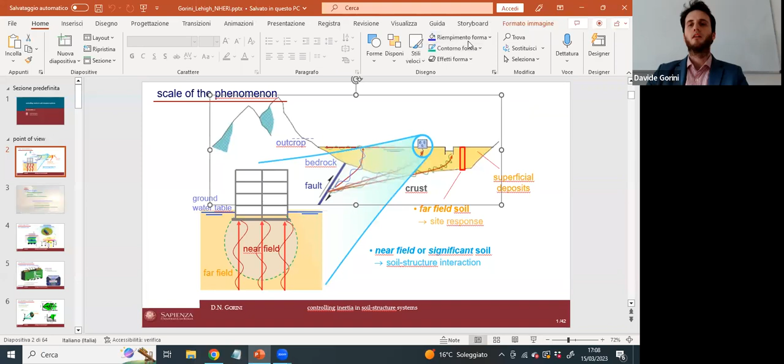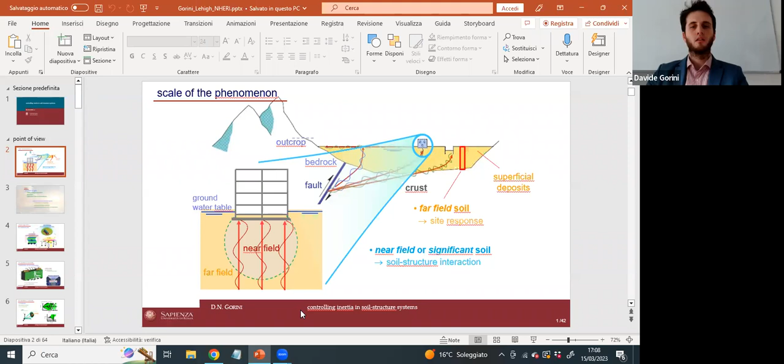Let's first look at... let's first focus on the scale of the phenomenon we are dealing with, because we know very well that seismic waves travel a long way before reaching us. In addition to the site effects related to the propagation of seismic waves in the far field, in the soil region not affected by the presence of the superstructure, the foundation input motion for the structure is further modified by the direct interaction of the structure with the so-called significant soil region, or near field soil region.

That is not to be confused with near field earthquakes, which instead have a short source-to-site distance. Soil-structure interaction effects localize in this region and are due to the exchange of inertial forces between structure and near field soil region, and to their different mechanical properties. I will call this system the foundation-near field system, or geotechnical system from here onwards, or simply geosystem, which will be manipulated and analyzed today in order to mitigate earthquake-induced effects on some common structural typologies, such as girder bridges, buildings, frequency-based anti-seismic devices, and so on.

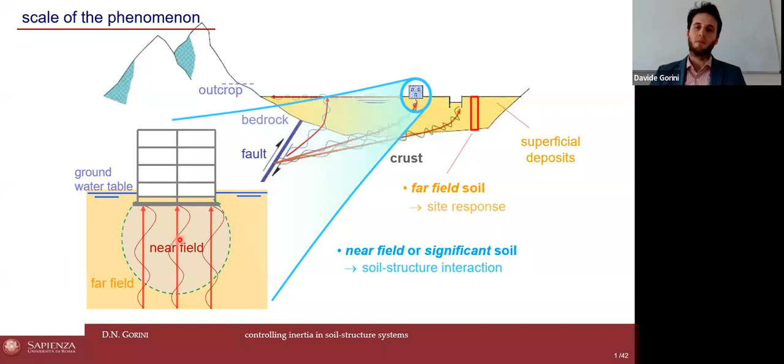So the sunrise in the background is due to the fact that the seminar aims at providing some openings towards new solutions in which the soil is regarded as a cardinal component to control structural vibration. To this end, I first need to introduce some numerical methods able to account for the distinct features of soil-structure interaction in the nonlinear dynamic analysis of structures, for then controlling them in the second part of the seminar.

And therefore, to this end, in the second part of the seminar I will introduce the concept of seismic resistant soil-structure systems, providing some passive seismic protection solutions strongly interacting with soil. That will be faced exactly by using the discussed numerical methods.

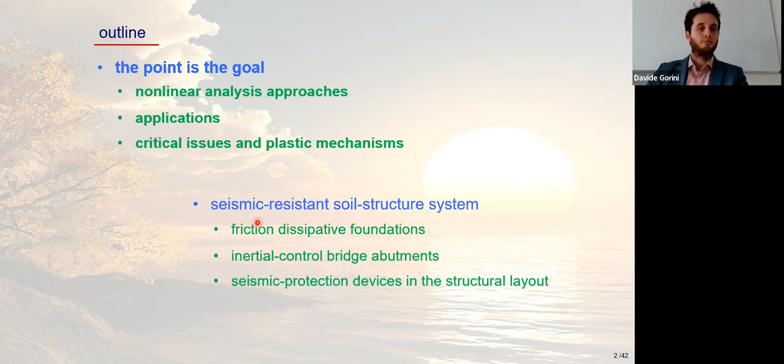So let's go through the first part. I see three levels of knowledge of the problem: understanding, design, and assessment.

Understanding complex phenomena typically entails a refined, detailed analysis of specific problems, while design has completely different requirements, because it is definitely, and fortunately, based on analytical or robust simplified numerical procedures in order to get very reliable and manageable results.

Assessment can be associated with an advanced verification stage of structures, and from the standpoint of numerical modeling, it's more or less in the middle between the former goals. So the analysis approaches related to these goals will be used in a complementary manner in this seminar.

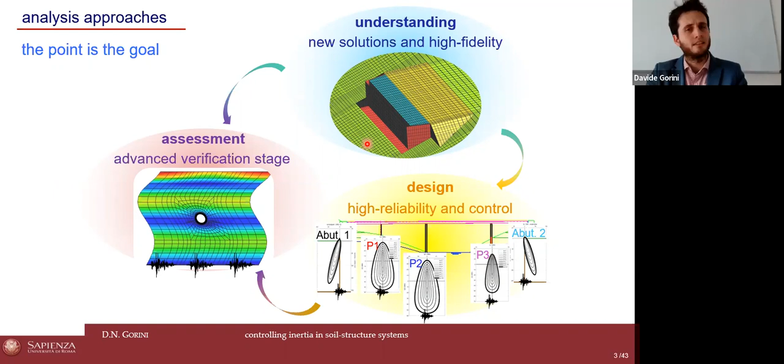I will start to employ an advanced numerical modeling technique to point out the importance of soil inertia on the structural performance, as important additional effects to the ones developing in the superstructure that are instead, in my view, most well known in the literature, at least with respect to the soil effects.

This is a reference example of the so-called direct approach, that entails the use of nonlinear dynamic analysis on the whole soil-structure system, simulating in a unified fashion the propagation of seismic waves. Hence, soil-structure interaction effects are implicitly taken into account in the computation.

This full soil-bridge model was implemented in OpenSees during my PhD and is inspired by the case study of the Pantano Viaduct, that would be the approaching structure to the Messina Strait suspension bridge in Italy.

So the structural model is very simple. It's composed of a continuous deck presenting an alternating strong and weak contact with vertical elements. With strong contact, I mean that the deck is connected also longitudinally to the vertical support and not only in the transverse direction. The subsoil is composed of a dry deposit of the well-known Messina gravels.

And the sole longitudinal component of a near-collapse earthquake is applied to the base nodes of the soil domain. So the nonlinear dynamic analysis on such a system was...

carried out using the OpenSees interpreter for parallel computing and using the supercomputing resources at the DesignSafe facility in order to get reasonable computation times.

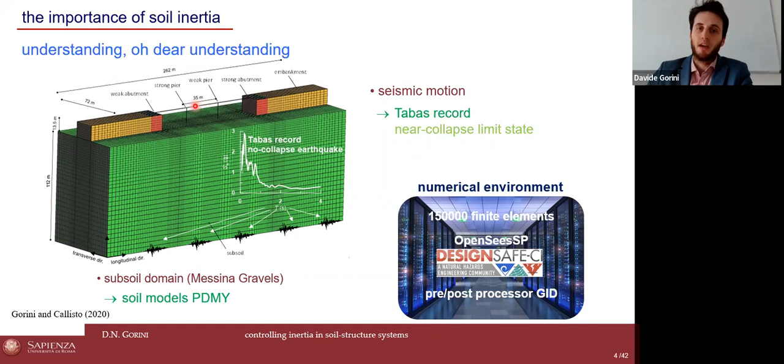Since the focus is for the moment on the soil inertia only, the structural behavior is regarded as a simple viscoelastic behavior, while the soil behavior is modeled through the PDMY model, that is formulated within the context of multi-surface plasticity with kinematic hardening and non-associative flow.

So the hardening response starts from the innermost yield surface until the attainment of the outermost ultimate surface, corresponding to critical state conditions for the soil. The model was calibrated on several experimental data on undisturbed samples of Messina gravels.

As an example over here, you can see the response to an undrained cyclic triaxial test. This is the relationship between the deviatoric stress as a function of the mean effective stress, and this is the evolution of the pore water pressure buildup with the axial strain.

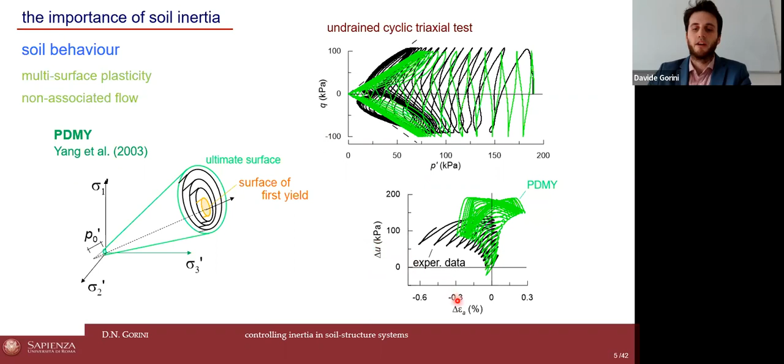So let's come to the performance of the bridge, expressed in terms of time evolution of the longitudinal displacements of the abutments and the strong pier, and the relative acceleration response spectra, and the post-earthquake deformed shape of the bridge.

Well, the dynamic response of this case study of the bridge is going to be controlled by the response of the strong abutment. In fact, the dynamic amplification of the structure localizes in this spectral region, in which the spectra of the strong abutment and the strong pier show the maximum ordinates.

And this can be ascribed to the resonance of the soil-abutment system according to a first mode shape. In fact, the spectra of the strong and weak abutments are basically overlapped over here, and therefore this amplification cannot be related to the dynamic effects transferred by the superstructure.

This amplification engages in turn the nonlinear soil behavior, causing significant irreversible displacements and reflecting in permanent internal forces in the structural members. So soil inertia is driving the bridge response.

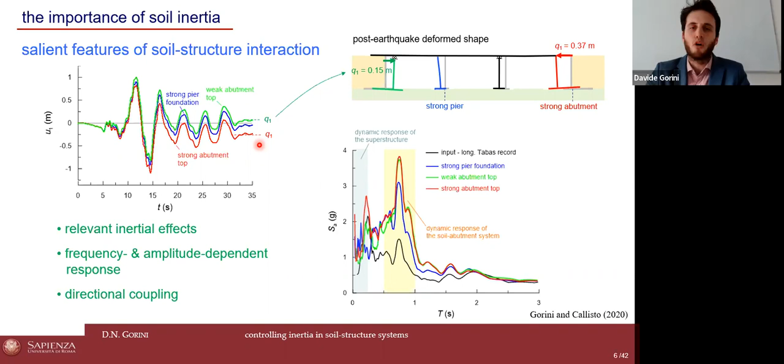And these peculiar features can be quite well captured by a direct approach, which however presents some complexities, because in addition to the computational effort, it also requires a non-trivial implementation of the model and interpretation of results that make this approach less practical for design purposes, for which instead my standpoint to include soil structure interaction in the nonlinear dynamic analysis of structure is the macro element approach.

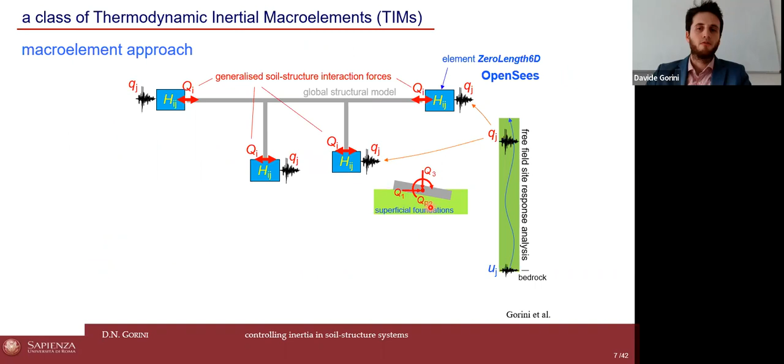To date, it's been mainly developed for shallow foundations and oftentimes neglecting soil inertia, while here a wider class of macroelements is proposed, conceived to simulate the nonlinear and inertial multi-axial response of geotechnical systems in the structural analysis at minimal computational effort, because the macroelements are implemented in OpenSees as multi-axial materials that can be assigned to a new zero-length finite element connecting two overlap nodes that can be connected to the generic base node of the global structure model.

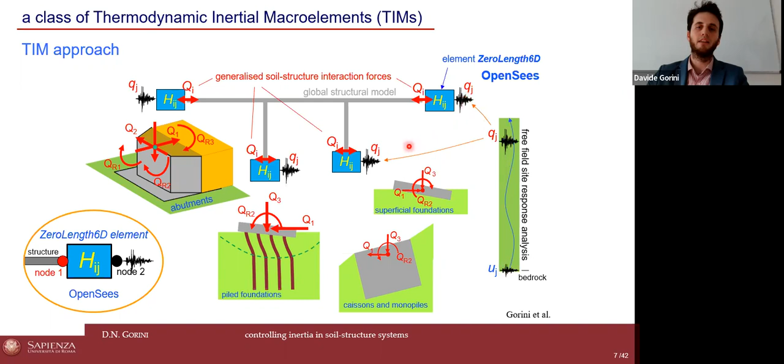The generic macroelement, called TIM, thermodynamic inertial macroelement, reproduces the behavior of the foundation structure and of the near field soil region, and under dynamic loading is perturbed by a free field ground motion to carry out a nonlinear dynamic analysis in the time domain on the global structural model.

A TIM is a relationship between the generalized forces acting at the soil structure contact node, Q sub I, and the corresponding displacements and rotations, small q sub j.

Without going through the mathematical details, the TIMs are formulated as multi-axial, multi-surface plasticity models with kinematic hardening, derived within a rigorous thermodynamic approach typically called hyperplasticity, so that the incremental response can be obtained by simply differentiating two consistent potentials: the energy and dissipation function.

The yield surfaces of a TIM constitute the so-called plastic domain, within which the model exhibits an elastic plastic response, while the inertial effects developing under dynamic loading are reproduced through appropriate participating masses. So TIMs can exhibit a combined nonlinear and frequency-dependent response.

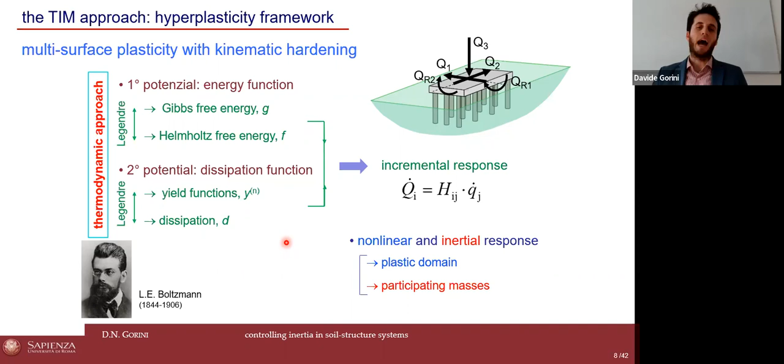Three are the basic ingredients for their calibration: ultimate capacity surface, initial stiffness matrix, and participating masses of the soil foundation system. As per the ultimate capacity surface, this corresponds to the load combinations activating the global plastic mechanism of the geotechnical system. And in the TIM approach, it represents the outermost yield surface of the plastic domain.

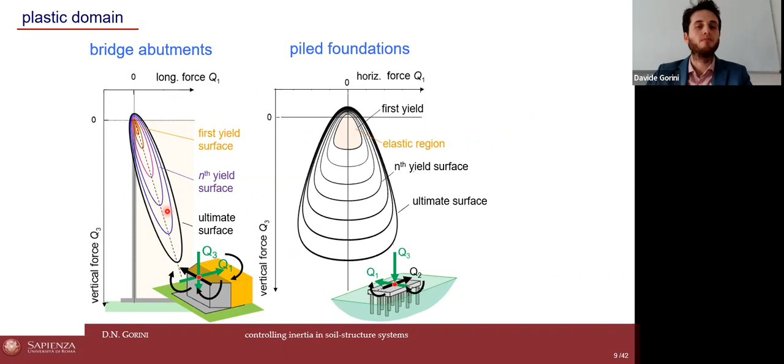Yield surfaces are assumed to be homothetic to each other, limiting the representation to the longitudinal and vertical space of the loads transferred by the superstructure. These are the initial configurations of the yield surfaces for the TIM for bridge abutments and pile foundations.

Surfaces evolve in the force space according to a consistent kinematic hardening law, presenting an increase in size from the innermost first yield surface enclosing the elastic response up to the ultimate locus, the ultimate capacity surface, which can be calibrated straightforwardly based on standardized procedures.

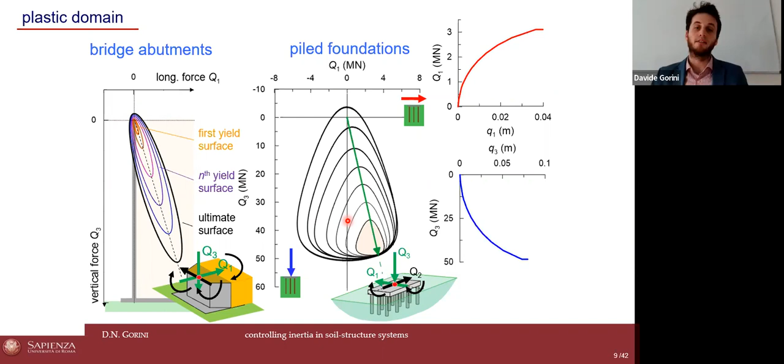For bridge abutments, the ultimate surface is represented by a rototranslated hyperellipsoid in the 6-dimensional force moment space of the forces exchanged between abutment and deck. While for pile foundations it is a hyperegg with superelliptical generatrices, reflecting the importance of load direction on the strength and stiffness properties of the geotechnical systems.

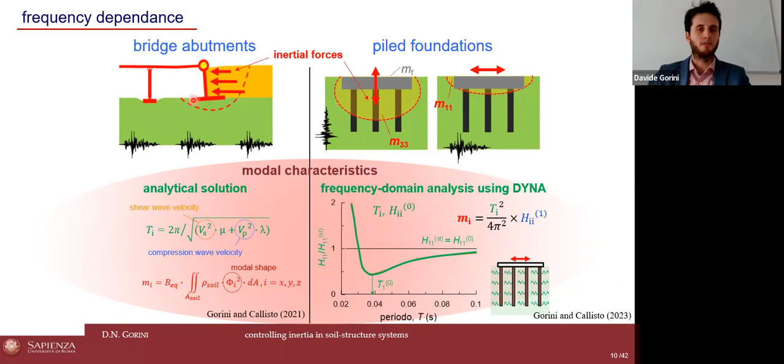Now, frequency dependence relates to the mass involved in the dynamic response. Using the TIM approach, this can be simulated by assigning to the generic soil structure contact node masses, M sub I, evaluated together with the initial stiffness matrix of the macroelement in order to reproduce the dynamic amplification corresponding to the resonant features of the geotechnical system.

For bridge abutments, the modal periods and masses along the several degrees of freedom of the geotechnical system can be computed through analytical solutions. Then the initial stiffness matrix of the TIM can be obtained simply by the equation of the vibration period of a single degree of freedom system for each degree of freedom of the soil structure contact.

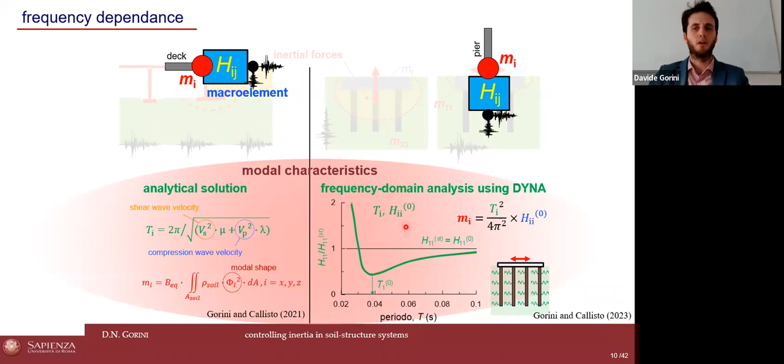For pile foundations, the participating masses can be taken as a function of the small strain vibration period and initial stiffness matrix, quantities that can be straightforwardly obtained, for example, using the software developed by Professor Novak.

Inertia models the cyclic response. Let's carry out a series of dynamic analyses on this coupled soil-abutment model and on the respective MEM, applying to the front wall in the former case and to the free node in the latter case a longitudinal load varying over time with a sinusoidal law, varying the period.

This is the resulting dynamic amplification curve at small deformation levels, quite well captured by the MEM, in which the maximum displacement of the abutment top, normalized with respect to that produced by a static force, is plotted as a function of the period.

The response is dominated by the first mode that occurs at a relatively large period, 0.6 seconds, because of the important inertial effects coming from the embankment mainly. This corresponds to a much more open force-deformation cycle with respect to that produced by a static application of the load, shown in cyan.

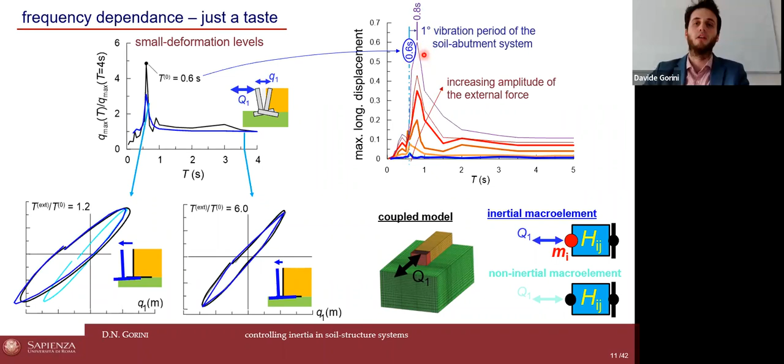Moreover, in the nonlinear regime, the masses of the MEM interact with activated plastic flows and therefore with a reduced tangent stiffness of the model, elongating the natural period, as is evident looking at the dynamic amplification curves for increasing load amplitude levels. This is the small strain vibration period, while 0.8 seconds is the fundamental vibration period in the longitudinal direction for this system at large strain levels.

A comprehensive validation of the MEMs is reported in the relative papers, while now I'm going to use this approach for predicting the dynamic response of some peculiar structural topologies.

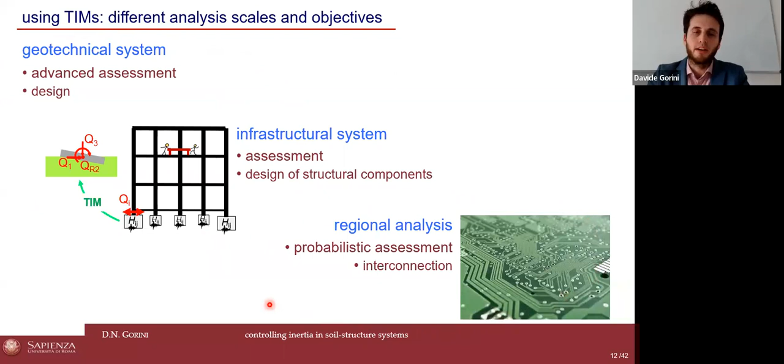By virtue of their computational efficiency, MEMs can be used for several purposes, from the analysis of the single soil-structure system to extensive studies aimed, for instance, at pointing out critical issues in the current design methodologies.

That is exactly the case of a large research project recently funded by Italian Civil Protection, concerning the seismic reliability of Italian code-conforming bridges, in which I was involved and had the opportunity to work with several people with different backgrounds.

The MEM approach was used to model structural interaction in the nonlinear dynamic analysis on a variety of soil-bridge layouts, and the models were all implemented in OpenSees. Four structural typologies were considered with reference to three sites with high, medium, and low seismicity. A multiple stripe analysis was carried out, considering 10 seismic intensities and 20 natural records for each.

The goal of the next couple of slides is to point out critical mechanisms affecting typical structural layouts in order to control them in the second part of the seminar. For brevity, I'm going to focus only on the case of the tall viaduct in L'Aquila, in the high seismicity L'Aquila region, subjected to the selected 200 seismic records.

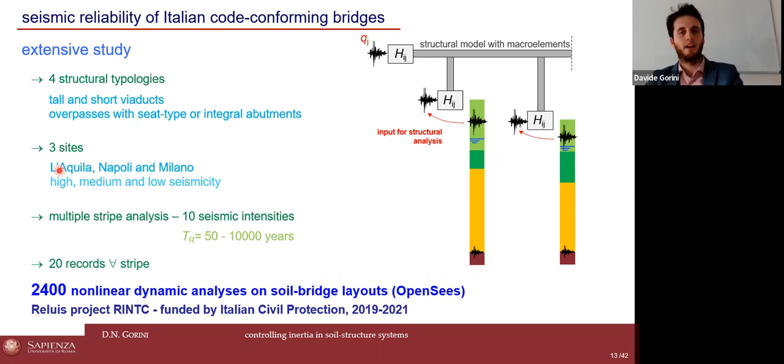The bridge rests on 5 supports, having deep foundations, and the soil presents a shear wave velocity varying from 200 meters per second at the foundation of abutment A1, up to 1,000 meters per second in correspondence of the bedrock, located at 95 meters of depth.

As per the static scheme, the deck is connected longitudinally to piers P2 and P3, while to abutment A2 through a couple of viscous dampers, and it's free at P1 and A1. In the transverse direction, the deck is connected to all supports.

The MEMs for the abutments and the piers' foundations were calibrated using the respective procedures just discussed. The piers are modeled as fiber section beam-column elements reproducing the effective properties of the reinforced concrete cross sections. The bearings are modeled as a proper assembly of rheological elements, and finally the deck is regarded as equivalent linear beam elements.

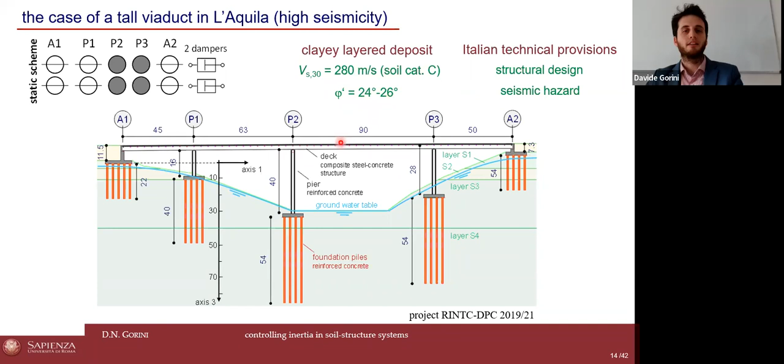I missed to say that the soil friction angle ranges between 24 and 26 degrees. A staged analysis procedure was adopted, in which after the gravity analysis, the 3-component seismic motion is applied to the base nodes of the macro elements.

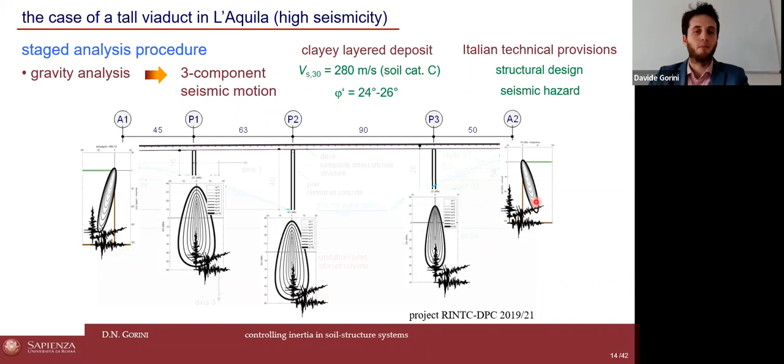Let's refer to the most severe performance level, which for the bearings consists in the uplift of the bearing in the vertical direction and in the attainment of the maximum stroke and of the shear resistance of the bearing in the horizontal direction, depending on the type of bearing we are talking about.

For geotechnical systems, the severe damage consists in the failure of the foundation piles. These are the computation times of the set of analyses carried out using the bridge model with TIMs. The computation times are very low and don't require any partition of the model, nor the use of particular computing resources.

Looking at the results, a critical mechanism occurs starting from stripe 5, as an intensity level equal to 5, which is lower than stripe 7, referring instead to basically the design seismic intensity for the ultimate limit state.

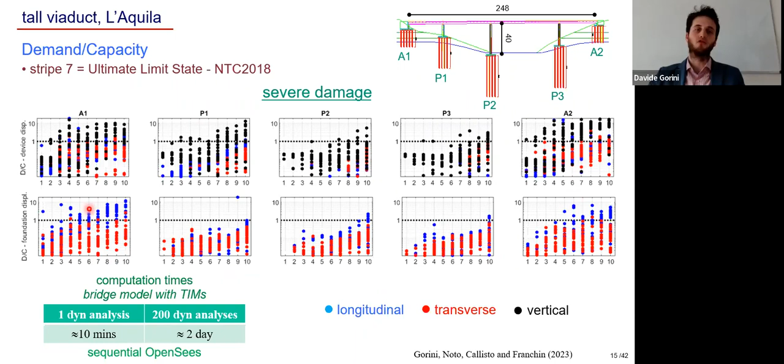This is mainly because of the inertial forces coming from the abutments, from the embankment of the abutment. So critical mechanisms are represented mainly by the attainment of the capacity in the horizontal and vertical direction for the bearings of the abutments and pier P1, and by the failure of the foundation piles, mainly in correspondence of the abutments, exactly for the soil inertia pushing the abutment inwards.

This result, in my view, shows something relevant, because the dynamic performance of a structural system affected by soil tends to be controlled by a delicate arm wrestling between inertia and dissipation. Inertia amplifies the dynamic response in correspondence of the resonant frequencies of the whole system. This facilitates strength mobilization, also in systems typically regarded as linear in design and assessment, such as the case of abutments.

But these critical features can also be regarded as a resource for a system, because it's well known that strength mobilization, the attainment of the strength, limits the forces that can be transferred to the superstructure. And this leads to the cardinal question pursued in this seminar: how can structural inertia be controlled?

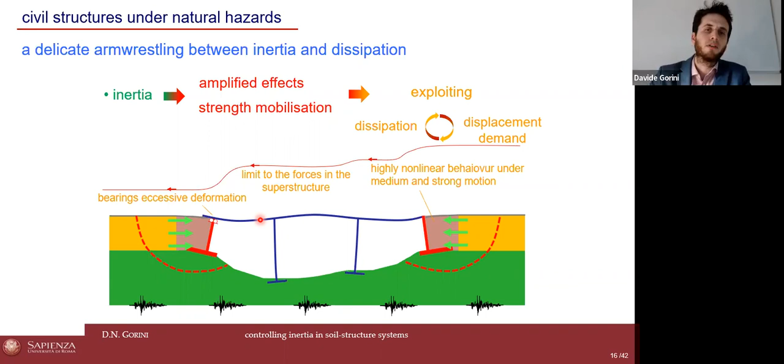To this end, let me first introduce the concept of a seismic resistant structural system. I mean a system able to balance its intrinsic and added features towards the satisfaction of design requirements. To reach this balance, I'm going to limit inertia in the overall system by weakening the geotechnical system, or tune properly the dynamic response of the geotechnical system to that of the superstructure.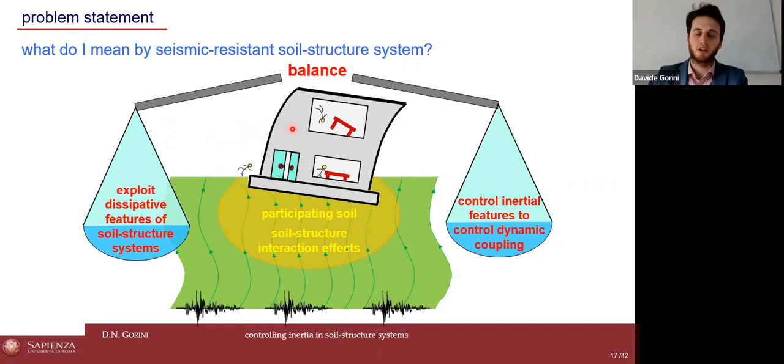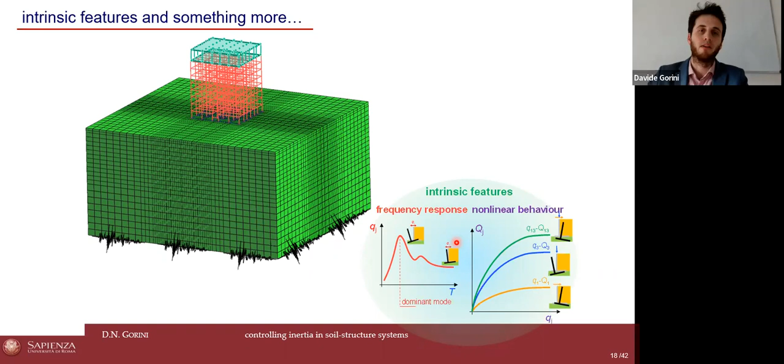Of course, by considering the intrinsic features of the foundation soils that we have just seen can play a role, but in some cases this may not be enough. So we may need something more. The structural layout can be equipped with additional dissipative sources placed at the foundation levels or within the structural layout. In many cases, these technologies interact profoundly with soil.

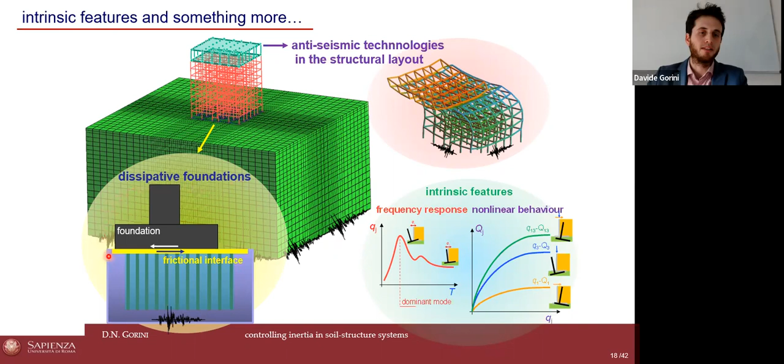Let me start closer to soil, talking about a mitigation technique whose performance is strongly related to the mechanical properties of the foundation. I'm talking about friction dissipative foundations.

Some years ago, Professor Luigi Callisto and I were impressed by the adoption of this solution in the case of the Rion-Antirion cable-stayed bridge in Greece, and then the Izmit Bay suspension bridge in Turkey, where the foundations of the tower were provided with an easily implemented solution consisting of a group of piles not connected with the overlying caisson, because of the interposition of a gravel layer between them, allowing for a controlled displacement of the caisson with respect to the foundation piles under strong shaking, dissipating energy by friction and therefore limiting the maximum shear forces transferred to the tower.

Our focus was at first on the foundations of the Izmit Bay Bridge only, employing a very advanced numerical modeling that I don't want to dwell on, because from that understanding a simplified interpretative model was devised for direct application in design. In the method, the foundation input motion comes from a ground response analysis and is applied to the base of a modified Newmark model composed of a rigid block representing the foundation combined with a single degree of freedom system, providing a very basic description of the dynamic response of the superstructure.

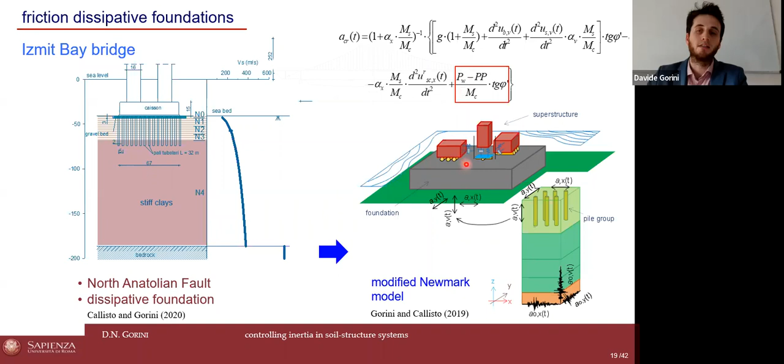This is the friction angle of the interface, but it also depends on the foundation mass, on the vertical motion, on the inertial effects developing in the superstructure, and on additional water pressures acting on the footing, for instance in the case of submerged foundations. So, in order to get a more general view of the factors controlling this quite complex performance of the friction foundation, an extensive study was carried out using simple Ricker wavelets as input motion, characterized by an amplitude and a period.

I'm going to discuss a couple of results of the study, in which, for simplicity, the seismic motion is composed of the longitudinal component of the base motion. Here you can see the relationship between the maximum relative displacements between the foundation and the underlying soil, expressed in a non-dimensional form, as a function of the interaction parameter XIR, intended as the ratio between the fundamental vibration period of the superstructure and the mean period of the input motion.

Note that other descriptors of the effectiveness of the friction interface can be equivalently used, for instance the reduction of the maximum spectral accelerations in the foundation with respect to the input one.

So this quantity takes, more in general, the name of generalized output quantity. These trends refer to a decreasing value of the mass participation factor of the superstructure.

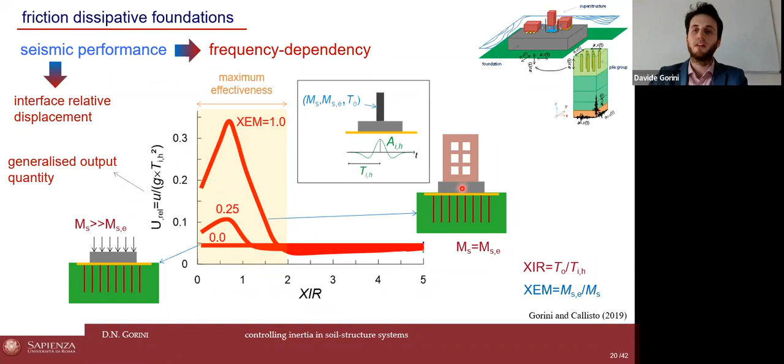It can be noticed that the performance of the foundation is strongly affected by the interaction parameter. That's because of the inertial effects developing in the superstructure, which in this region of maximum effectiveness of the friction foundation agree with the inertial forces developing in the foundation.

This result, together with the other abacuses obtained in this study, can be used for a preliminary design of the foundation. The objective is to limit the maximum shear forces transferred to the superstructure.

So, given a structure in a specific site, a design requirement can specify that the maximum spectral acceleration, SA max, be lower than a limit value, a threshold, SA lim. Accordingly, the target generalized output quantity, Y sub I lim, can be computed as SA max minus SA lim, normalized with respect to SA max.

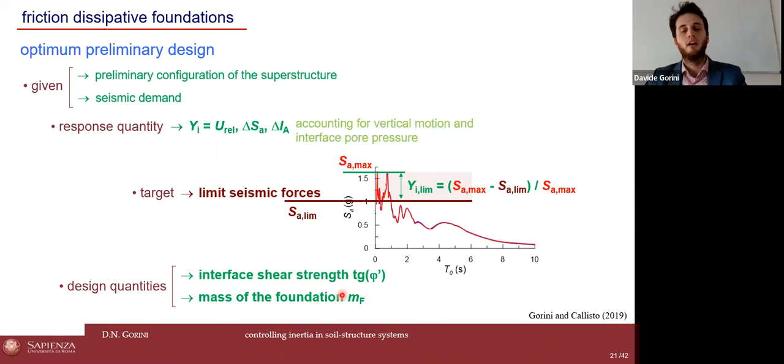So the design consists in determining the optimum values for the interface shear strength and mass of the foundation, producing the desired generalized output quantity.

This abacus relates the interaction parameter corresponding to the maximum effectiveness of the foundation to the relative excited mass. This is basically an indicator of the relative contribution of the inertial forces developing in the superstructure and those in the foundation to the overall dynamic response.

The results are quite well approximated by a bilinear trend. This means that, given XIR for the case at hand, the foundation mass can be computed.

And finally, through this abacus, one can obtain the shear resistance along the dissipative interface by considering the target generalized response quantity, assuming a structural damping, and using the optimum value of the relative excited mass found before.

So this simple design procedure points out that the optimum performance is strongly related to the inertial features of the entire soil-foundation-superstructure system.

But why not extend this simple, easily implemented solution to the case of bridge abutments, specifically the problematic bridge abutments, to control soil inertia transfer to the deck?

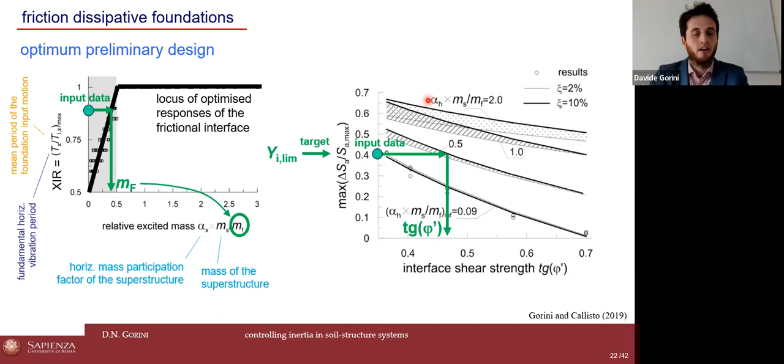Well, in this direction, let's take a first simple step. Let's consider, as a first case study, an abutment with shallow foundation.

But this capacity is not strictly needed under seismic loading as it is under static conditions, so it may be reduced in order to enhance energy dissipation under dynamic conditions.

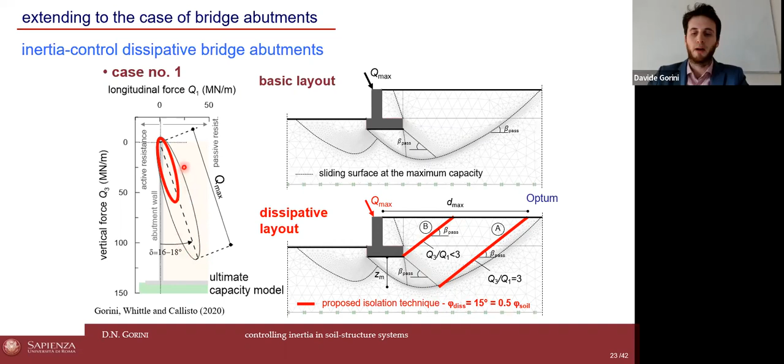In fact, the outer yield surface, the dissipative surface, is involved in a mechanism for load ratios equal to or greater than 3, while the interface closer to the wall is involved for longitudinal loads that are proportionally larger.

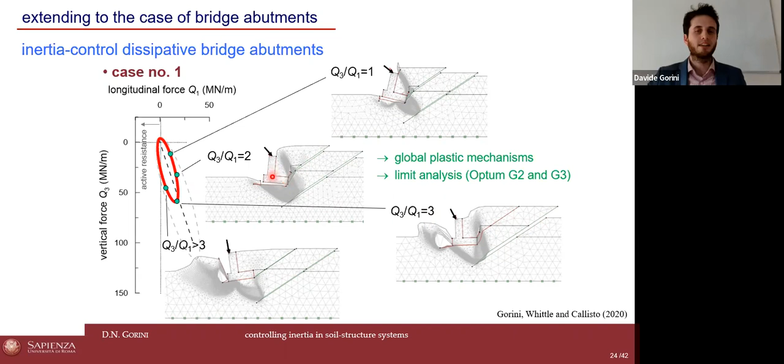This abutment is exactly the one of the full soil bridge model shown at the beginning. So let's try to test this solution on this case study, using the TIM approach to model soil-structure interaction in the structural analysis, and referring to the same seismic input shown at the beginning.

In this case, the model for the abutments was calibrated considering the same initial stiffness of the basic layout, and the plastic domain calibrated on the new capacity surface locus. Finally, the participating mass of the soil-abutment system is computed as this volume, while this inclined boundary follows the outer dissipative interface.

Now, the performance of the bridge is quantified in terms of the time evolution of the relative displacements between the strong abutment and the strong pier, which are the only elements connected longitudinally to the deck, and as time evolutions of the flexural forces at the base of the strong pier: this is the shear, this is the bending moment.

Consider the performance of the bridge in the basic layout, without dissipative interfaces, shown in blue. Marked irreversible relative displacements develop in the deck during the interval of maximum intensity of the seismic motion, reflecting in important permanent internal forces at the base of the strong pier.

This is because the strong abutment is driving the bridge response, with accumulation of important irreversible displacements inwards. But if structural inertia is controlled, the performance improves remarkably. In fact, both the permanent and the maximum internal forces in the entire bridge layout reduce a lot.

This is due to the combined effect of the attainment of the strength along the dissipative interfaces and of the lower, much lower soil volume involved in the dynamic response of the bridge. And if in principle we were able to fully inhibit soil inertia at the abutment locations, this would be the result shown in violet, leading to the minimization of the earthquake-induced effects in the entire layout.

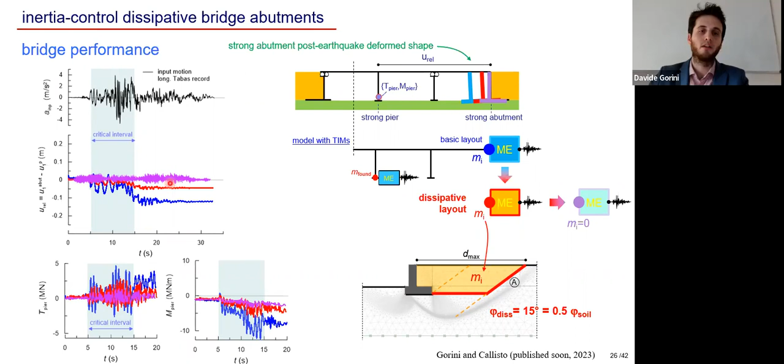Now let's apply this promising solution to the next case study, which refers to abutments with deep foundations. So the bridge performance is again analyzed using the TIM approach. The point is to calibrate the TIMs for abutments and pier foundations, considering the presence of dissipative layers within the soil.

Starting with abutments, this is the conventional layout of the generic abutment A1, but identical considerations can apply to abutment A2. This is the capacity locus of the conventional layout in the space of the longitudinal and vertical loads applied on top of the front wall. In this case, I'm using a slightly different layout of the dissipative layers.

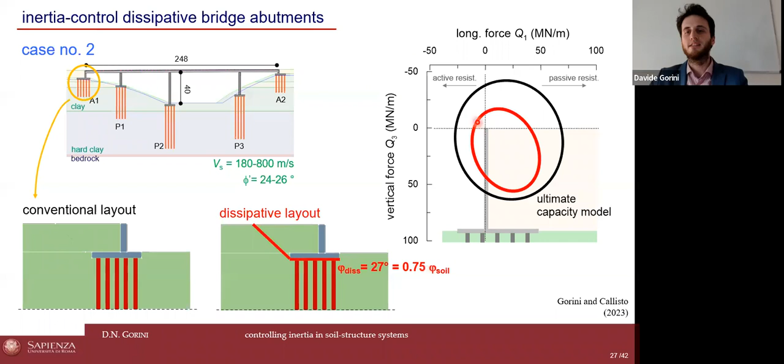This is aimed, as done before, to limit the inertia coming from the soil transferred to the superstructure. But in this case, in addition, in order to limit the horizontal capacity of the abutment, the piles are disconnected from the raft, again using a friction angle sufficiently lower than that of the soil. This is the resulting ultimate locus: the capacity is reducing a lot.

As per the foundations of the piers, this is the layout of pier P2, and this is the resulting ultimate capacity locus in the usual space of the longitudinal and vertical load acting on the footing. In this case, the inertial control layout is exactly equal to the one of the Rion-Antirion Bridge foundations, implying the disconnection of the raft from the foundation piles.

The value of the friction angle of the dissipative interface was found using the optimized procedure discussed before. In calibrating the TIM, both the initial stiffness matrix and the participating masses of the soil-foundation system were taken equal to that of the conventional layout, while the ultimate capacity was computed through the numerical procedure called DeepFUL, recently developed, which can compute the multi-axial failure loads of pile groups. This is the resulting failure locus, meaning the inertial control layout has the same compressive bearing capacity as the conventional layout, but a null tensile bearing capacity, leading to a much lower combined failure load under multi-axial loading.

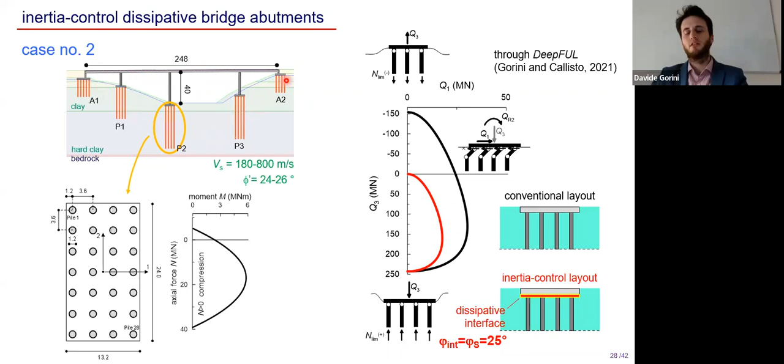The bridge with TIMs was subjected to a three-component seismic motion representative of a strong shaking with a return period of 10,000 years. Here you can see the force-deformation cycles in the geotechnical systems in the longitudinal and transverse directions for all supports, from abutment A1 and abutment A2, while for the pier foundation, here you can look at the moment-rotation relationship in the direction of the plane.

Compared to the standard layout, the inertia control abutment A1 undergoes much lower irreversible displacements inwards, despite the attainment of a reduced active resistance, and also despite the attainment of the passive resistance sometimes. These also reflect in reduced transverse displacements caused by the mobilization of the nonlinear behavior along a multi-axial deformation mode. This improvement in performance is less evident for abutment A2 because of its connection with the deck through a couple of viscous dampers that limit irreversible deformations.

Irreversible deformations instead increase for the pier foundations, because, differently from abutments, in this case we are not changing the inertia of the system, but we are reducing a lot its capacity.

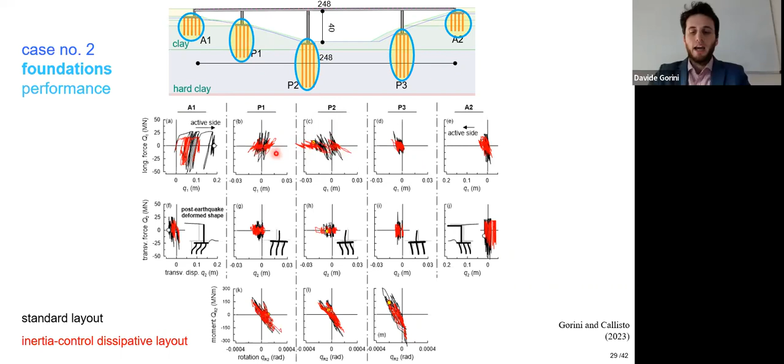If we look at the shear force-drift cycles of the bearing devices in the longitudinal and transverse directions, we can notice that this reduction of the inertial forces transferred by the geosystems implies a noticeable reduction in the displacement demands for the bearings. So, playing with the inertia and dissipation can make the difference.

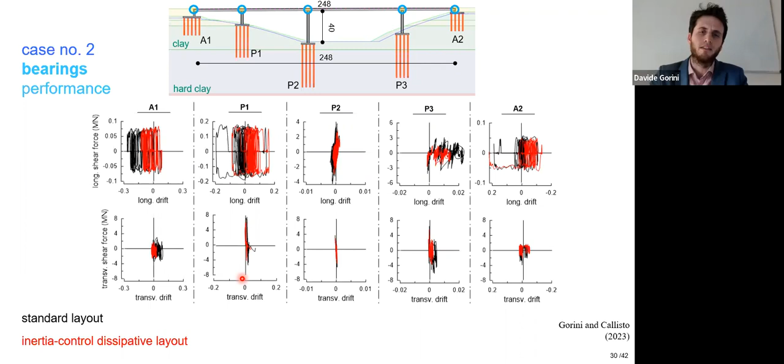These promising results encourage us to further develop this methodology, especially towards the development of optimized criteria for the selection of the friction angle along the dissipative interfaces of the inertia control abutments, and also to extend these solutions to different cases. Now I would like to go through the last topic of the seminar.

In my view, with respect to the previous developments, it's even less obvious that anti-seismic devices installed in the structural layout can be strongly affected by soil-structure interaction, such as in the case of frequency-based devices, but this is not the only typology sensitive to this issue.

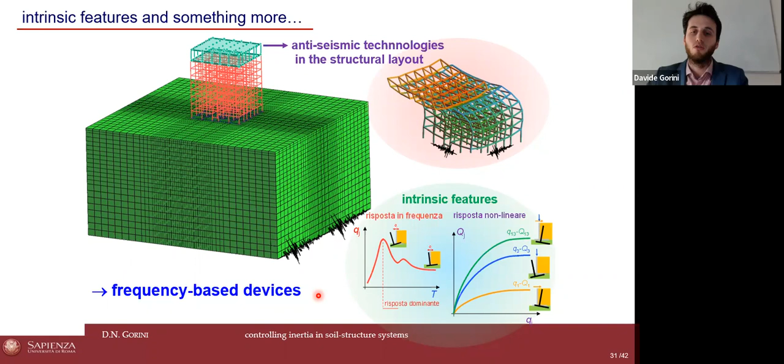In this regard, I'm going to introduce a research path concerning the seismic assessment of tuned mass dampers, in brief TMDs. In its basic configuration, a TMD is made up of a very small mass compared to the mass of the superstructure, and is connected through a spring and a damper aimed at minimizing structural vibration.

Optimal tuning of TMDs typically refers to a significant natural frequency of a structure, with the properties of the TMD referred commonly in non-dimensional forms, calibrated in order to optimize the performance - again, to minimize the vibration and deformations of the structure.

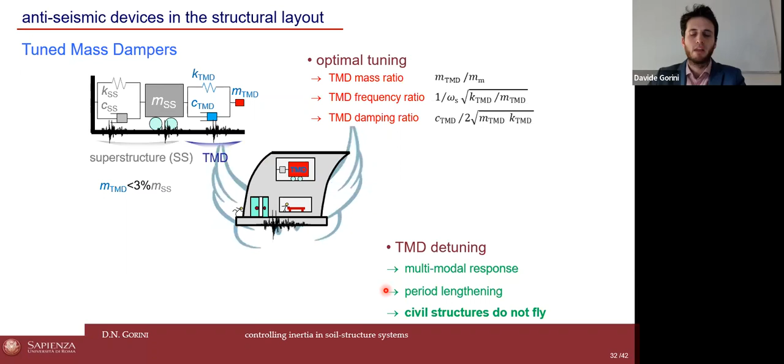Most available design criteria refer to the simple linear two-masses model, but several solutions demonstrated that such criteria are no longer optimal in the case of pronounced multimodal or nonlinear behavior of the structure, or because structures usually don't fly - rather, soil foundation interaction can alter the deformation modes of the structural system, detuning the TMD response.

On the other hand, fortunately, the TMD effectiveness increases with its mass. That is typically assumed as an input in design, but is limited by practical needs. This is especially true for existing structures due to the limited available space.

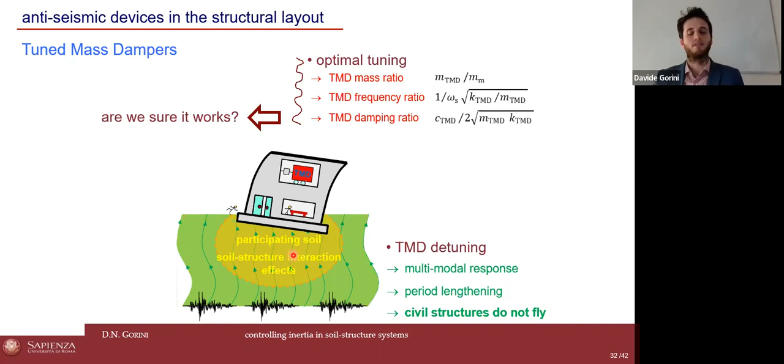So a possibility to overcome this limitation conceives the TMD as a super-elevation of the existing layout, connected to the rest through a combination of bearings. This solution is called the large mass ratio TMD, because it allows us to reach a much greater mass of the TMD with respect to the existing structural layout.

The design of conventional or non-conventional TMDs doesn't typically consider soil-structure interactions in a systematic manner. So first, I would like to use a refined modeling technique to point out the problem, in order to understand the phenomenon, for then trying to move forward. And this is the case study.

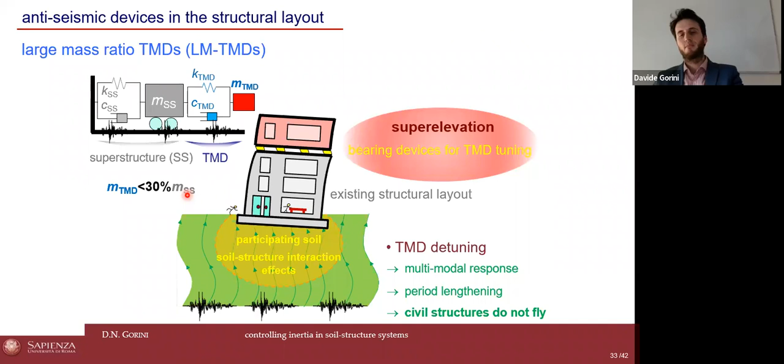This is a coupled soil-structure large mass ratio TMD model developed in OpenSees, describing the nonlinear and frequency-dependent features of the system.

This is a typical existing 8-story reinforced concrete structure resting on shallow foundations, dating back to the 70s, so designed for vertical loads only.

The super-elevation is composed of 2 additional floors, reaching a mass of the TMD that is 20% that of the existing structure.

The structure is assumed to be located in the high seismicity Pantano region on the Messina Strait, and this is the profile of the shear wave velocity of the soil with depth.

In order to limit the computation times of the nonlinear dynamic analysis, the model was parallelized using OpenSeesSP, and the analyses were carried out using supercomputing resources.

The soil behavior was described by the PDMY model, calibrated as mentioned at the beginning, while the structural members were modeled as fiber section beam-column elements, reproducing the geometry and nonlinear behavior of the cross sections.

8 spectrum-compatible seismic records were selected on stiff outcrop for each limit state considered, and the brown spectrum is the average one for a life safety limit state.

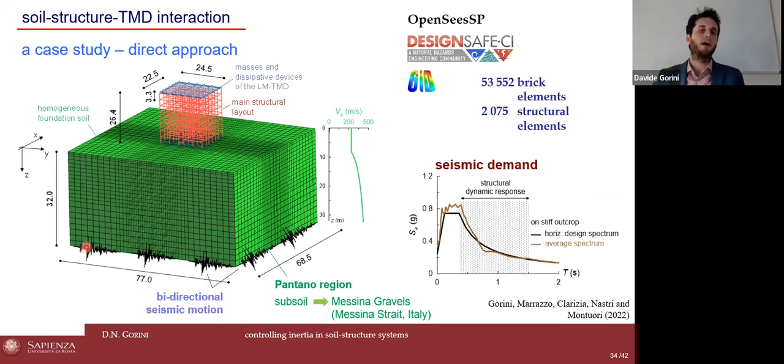The TMD properties were determined using an optimum solution developed by the research group at the University of Salerno in Italy, neglecting soil-structure interaction and referring to the case of large mass ratio TMDs, which I don't want to dwell on for brevity. In order to vary its configuration easily, the TMD is simply modeled as masses placed at the top of the columns of the last floor.

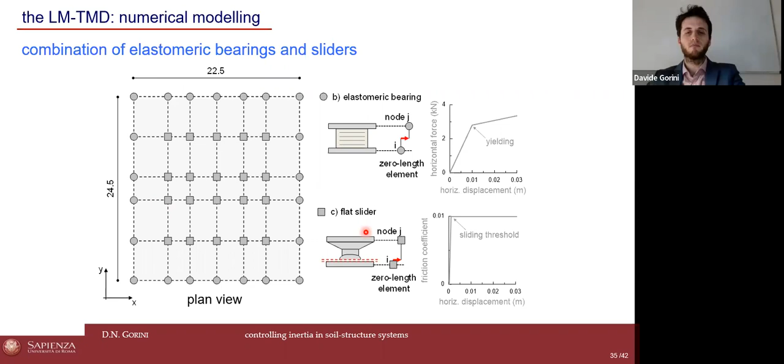These masses are connected to the existing layout through a combination of elastomeric bearings and flat sliders, calibrated in order to provide the design vibration period of the seismically resistant super-elevation.

Performance is studied by considering or not the presence of the TMD, and by comparing the results of the coupled model with the ones in which soil-structure interaction is neglected, where the foundation input motion comes from a ground response analysis. Here are the profiles of the horizontal maximum interstory drift, MID, for a life safety limit state scenario.

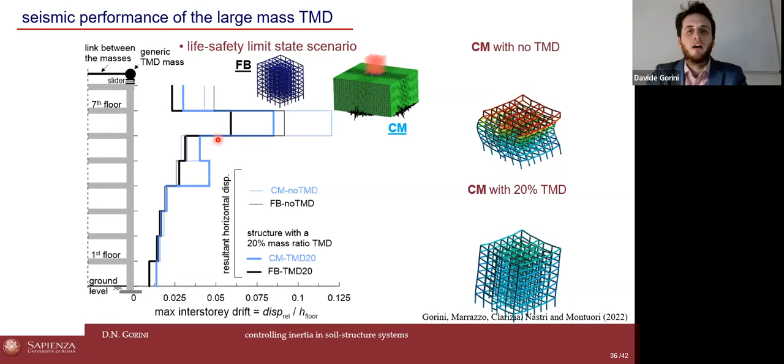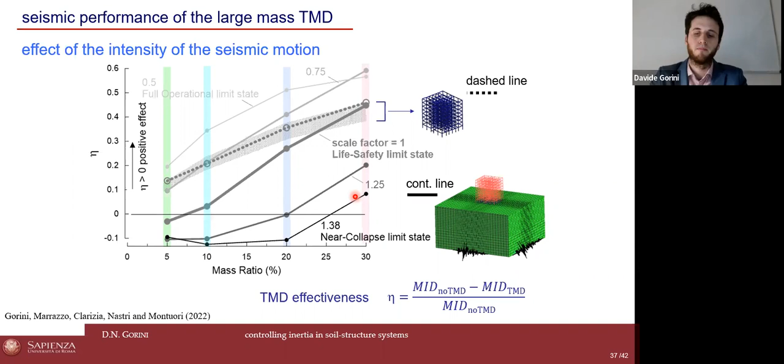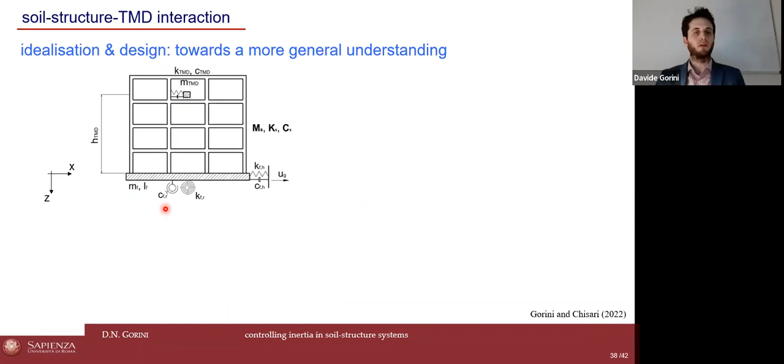For instance, from this coupled nonlinear soil structure TMD model, we can refer to a linear planar structure equipped with a TMD and resting on an equivalent shallow foundation subjected to the sole horizontal component of the seismic motion, in which soil-structure interaction can be reproduced through the widely used dynamic impedance functions developed by Gazetas and co-workers, simulating the translational and rotational frequency-dependent response of the foundation system.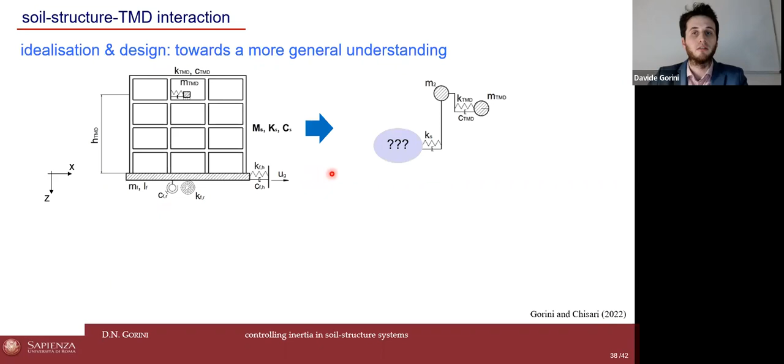And if we assume that the structure deforms proportionally to its first mode, it reduces to a single degree of freedom system. Now, the model was formulated in a non-dimensional form using the Buckingham-Pi theorem, and on this basis, a simplified interpreted model was devised that is able to vary independently all the non-dimensional parameters of the model.

The SDOF representing the superstructure is connected through the compliant base through a rigid link having a rotational inertia and a mass, in order to account for a modal height that can be different from the barycenter height of the structure system.

So a global sensitivity analysis was carried out on this system as a series, a large amount, let's say, of dynamic analyses, considering a large variety of structural layouts and assuming that the TMD be designed according to the well-known Den Hartog criterion. Because the focus was at first to point out critical issues in current design practice. The Den Hartog criterion is one of the most widely used basic solutions in practice, for then trying to propose something new.

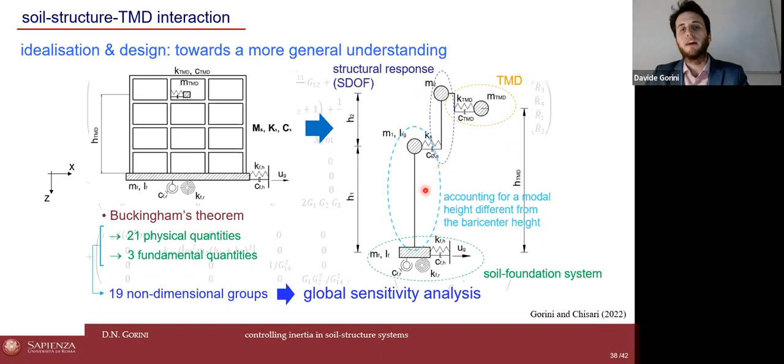So, as a result, over here, the effectiveness of the TMD associated with the model with compliant base is plotted as a function of the effectiveness of the TMD obtained with the model with fixed base, in which the effectiveness is in this case intended as the reduction of the maximum base shear forces in the superstructure.

So soil-structure interaction can even lead to a negative effectiveness of the TMD, but it's just in minor cases, because almost half of the samples are located in region 2, in which the TMD effectiveness is partly reduced by soil-structure interaction, despite the device still providing a favorable effect.

In fact, basically in this region, it's happening that the TMD response is partly detuned from the superstructure response because of combined translational rotational modes of the entire system.

So the objective of the design criterion that we're developing is exactly to move as many points as possible upwards towards region 1, in which the Den Hartog solution is still optimal. But to this end, I think that we need to know something more. So what are the factors dominating the reduction in the TMD effectiveness?

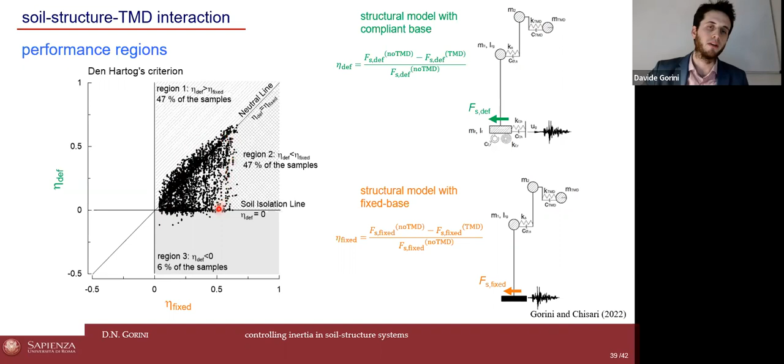Well, this information was obtained by using the elementary effect method by Morris applied to the results of the sensitivity analysis, and these are the resulting dominant parameters for the problem at hand. The figure shows the elementary effect associated with all parameters of the models with fixed base and deformable base. Basically, the elementary effect is an indicator of how much the model response is affected by that parameter. And when soil-structure interaction is considered, it can be inferred that the TMD performance is not only controlled by the usual structural damping and the TMD mass ratio, but also by some additional parameters.

First, the structure to soil relative stiffness, and parameters G7, 9, and 13 that are instead related to the rocking at the foundation level. Now we are approaching the end scene of this story because we are now in the process of relating the parameters characterizing the soil structure layout to the ones associated with the TMD producing the optimal performance.

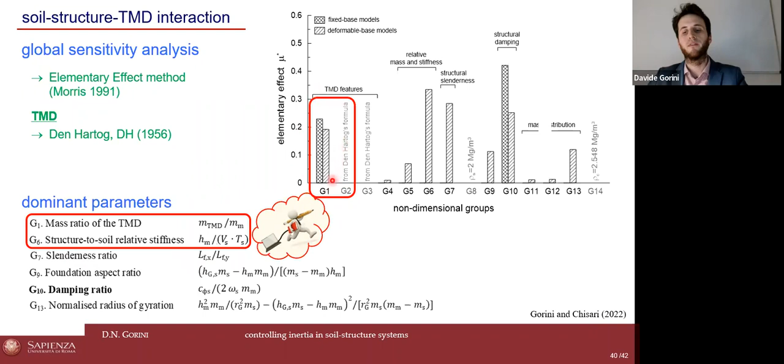For instance, if we look at the relationship between the TMD frequency ratio and the other circled factors over here, as a first result, this is the corresponding result. Actually, this is not yet published, so feel free to contact us if you need more information about it. So over here, the effectiveness of the TMD is plotted as a function of the frequency ratio of the TMD and of the structure to soil relative stiffness.

For a given mass ratio, the optimum value of the frequency ratio is definitely a function of the relative stiffness between soil and structure. And this optimized solution can lead to a much improved performance of the structure.

In fact, over here we can see this is an indicator of the effectiveness of the whole system, plotted as a function of the structure to soil relative stiffness, and this is the so-called TMD performance curve obtained with the basic Den Hartog solution for designing the TMD, while this is the optimized performance curve. So the performance is improving a lot because the red curve is moving upwards.

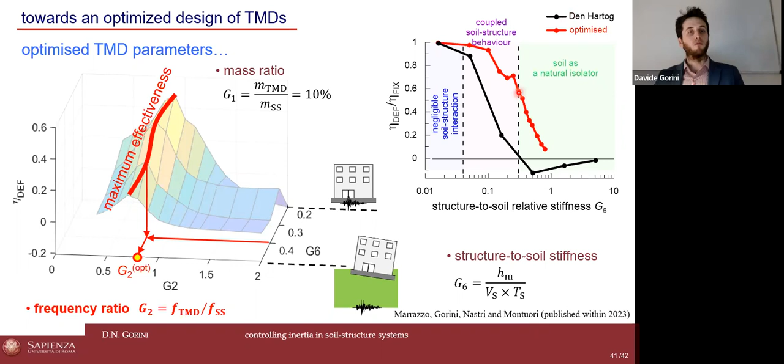Well, this is the end of this path through the meanders of soil-structure interaction as a means for controlling structural vibration, in which we have talked about some numerical methods able to include distinct features of soil-structure interaction in the nonlinear analysis of structures. And exactly using these methods, we pointed out some critical issues in current design methodologies, and we highlighted the importance of structural inertia in controlling the structural performance.

And to control structural inertia, we discussed several solutions. Basically, two options were discussed. First of all, I can exploit the dissipative features of the whole system, or I can tune properly the dynamic response of the geotechnical system to the one of the superstructure in a convenient manner.

And actually, in my view, this is a very fascinating path, because in order to reach the goal, we need to pass from conception to modeling, from modeling to design, where simplification and idealization, identification of the dominant factors of the response are fundamental for better guiding our idealization of reality towards effective solutions.

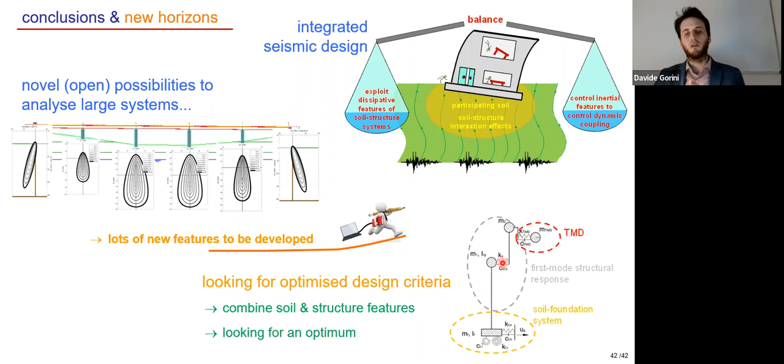And as a final remark, I would like to thank you and all the people that I have the honor to work with in developing these challenges. Thank you very much.

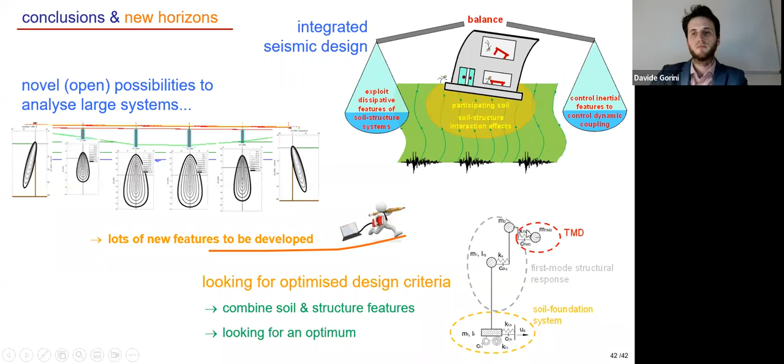Oh, sorry, David, that was very interesting. I had to try to unmute my system. I can't get my camera to come back on. I'm not controlling it here.

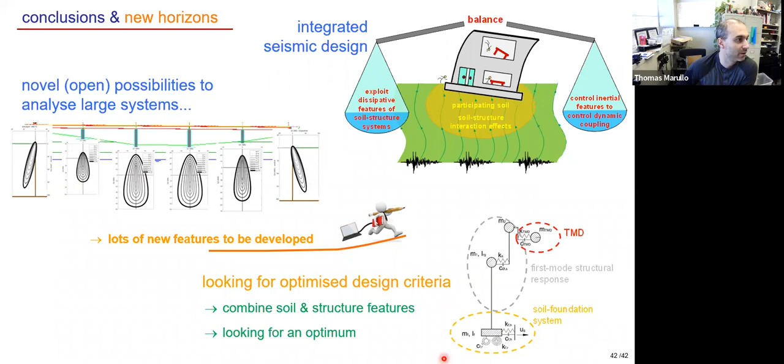I had a couple of questions, David. They're very interesting, but I'll wait to see if anyone else, we try to engage the audience here.

You're very active in publishing. It's very important, as you know, to get the word out, to communicate with people. I think this is very, very interesting here. Let's say we enjoy the studies. I think you pointed out soil structure interaction is very important. It can help or hurt, right? And it can play a role. Absolutely, it can play a role.

Yeah, and when I took geotechnical engineering, foundation engineering as an undergraduate, the professor, and I think he was right, he said when you're standing and you look under your two feet, the left foot could be under a different type of soil than the right foot. So there's a lot of uncertainty on top of absolutely everything else.

Yes, I had a couple of questions there. You had, I'll just call it a transfer function, but the transfer function was from the bedrock up to where the foundation was interfacing with the soil. When you had the macro elements, you ended up with it. I'll just call it a transfer function because the notation looks similar. So that the transfer, I'm not sure.

I'm not sure I get your point, Professor. Are you talking about the seismic input for the macro element, or something else? The macro element, yeah, I was curious about that. It's interfacing basically the waves originating at the bedrock. Do you have to do a deconvolution up to the interface? But the foundation, going down to the bedrock, the macro element, what does it represent?